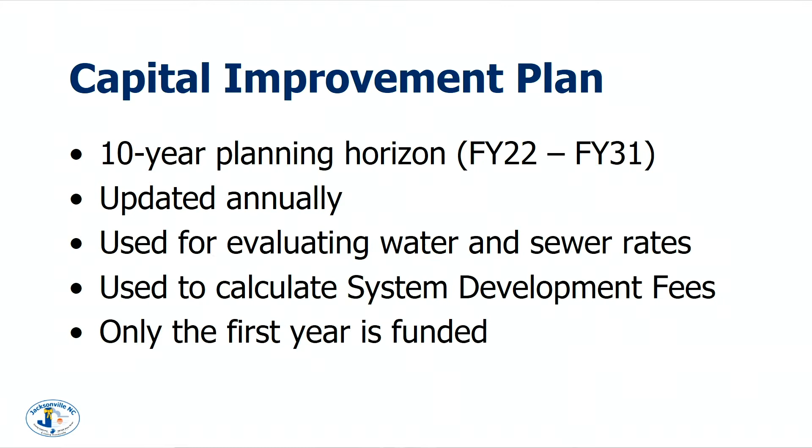We also have a system development fee model. Those system development fees are fees that developers or builders pay to essentially buy into the system, reimbursing the system for projects that have been upfronted by ratepayers to provide for additional growth. We use those growth and improvement related projects to help program those system development fees.

There's a statutory requirement behind system development fees that they have to be updated every 5 years. For us that will probably be next year, fiscal year 23. We use the capital improvement plan to program for those system development fees, and that meets all of the statutory requirements.

Again, only the first year of the plan is actually funded. The rest of those 9 years are used for planning purposes.

Yes sir, a question. When you present to the city council, all the departments are presenting their CIP to the council for approval. How does that work as far as when you're doing your portion of it? Is there a pot of money that's available that you have to fit within, or are you competing with the other departments for the money that can be given to you?

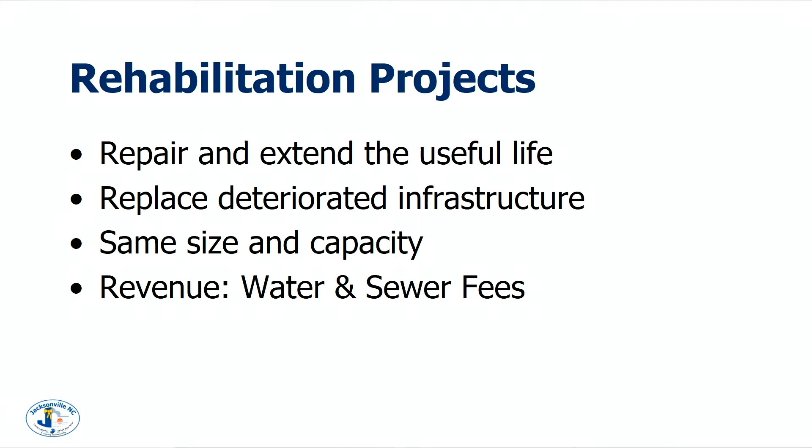The revenue source for those, again, this all comes from the Water and Sewer Fund, but within the Water and Sewer Fund, we try to divvy up the cost to where they should be applied. Because this is replacing 1-for-1, we are funding this solely through water and sewer fees, which are literally the monthly bill everybody pays. It's split out to pay for operations and maintenance, which is an ongoing everyday thing, including staff personnel, equipment, and electricity to run lift stations and pumps, but it also includes those rehabilitation projects.

In trying to decide which rehabilitation projects we're going to program or when we're going to program them, we use a work tracking software called Mobile 311. It's app and GPS based, and it rides on top of a GIS system. So we have people in the field, and when a point breaks in a water line, they mark it, flag it, put in what the repair is that they made, and from there we store that information. Then we can go back as we're making decisions and look at a geographical area and say we've got to do something here because we're really having a lot of problems.

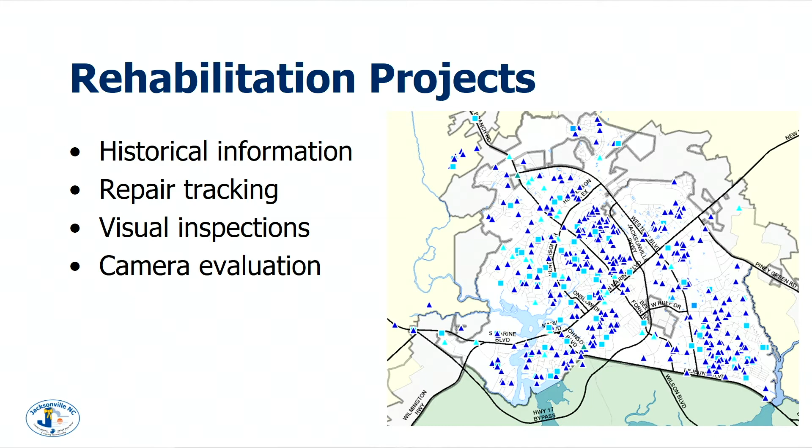A good example of this that we talked about at the last meeting is the branch water service. Over the past 2 years, we've been averaging somewhere around 50 or 60 water service repairs a year. At that point, we've got to get it out of our operational budget, out there replacing these, and get it into the capital improvement plan to do it as a project so we get better prices. It's not an emergency response in the middle of the night, and we're not having to pay overtime to respond. So we use information like that to help program these rehabilitation projects.

On top of that, for our sewer lines, we use visual inspections. A good example is the Bayshore right out front here across from City Hall. There are several depressions starting to develop right in the roadway.

That's an obvious indication that we're having problems underneath, and they're right over the sewer line. So it's pretty easy to track that we have repairs necessary there. If you start seeing those over a large area, or 5 or 6 of those along the line, you know you probably have joint failure and need to address that. Then the city has the ability to go in and jet or clean all the lines and camera the lines.

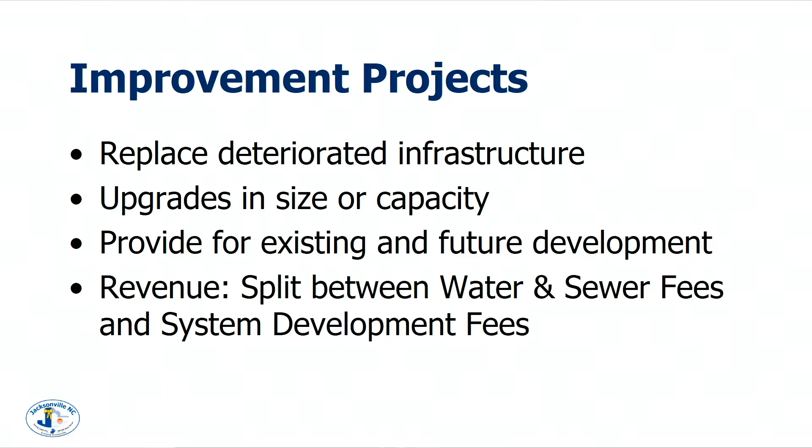From there, we move into improvement projects. The difference between a rehabilitation project and an improvement project is that the improvement project looks at infrastructure that needs to be replaced, but also considers that it might be in a basin with additional growth potential. There, we may have to replace that existing infrastructure, but based on our master plans or development pressure, it makes sense to upsize. For example, you may have an existing 8-inch gravity sewer we're having problems with, and we identify that it really needs to be a 12 or 15.

So if we're going to replace it with an 8-inch anyway, we might as well upsize it. What we do there is split that project, at least budgetary wise. The water and sewer fee ratepayers are responsible for that 8-inch portion. Using easy round numbers, if that 8-inch costs $100 a foot to replace, and upsizing to a 12 or 15 costs $125 a foot, the first $100 a foot comes from water and sewer fees, those monthly charges. The additional $25 is recovered through our system development fees. Our model actually calculates that out for us.

We do have to go in and identify what percentage of the project is growth-related and what percentage is rehabilitation, but we use that to appropriately program our system development fees so that growth is paying for itself as it develops out.

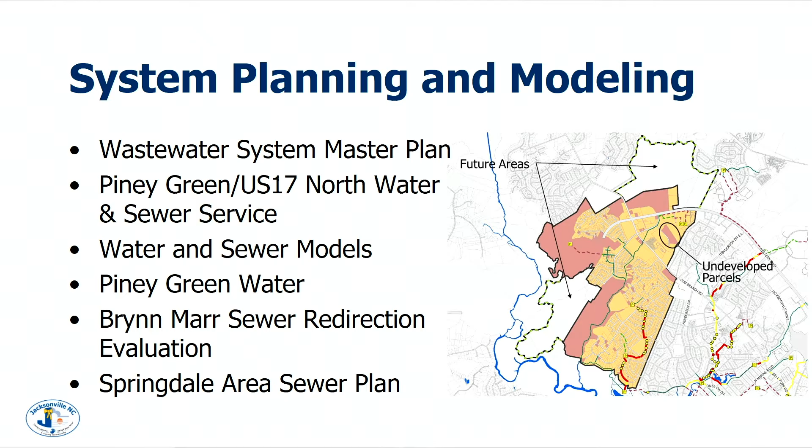I've been in public services since 2005 or 2006, I believe — it all kind of rolls together after a while. But before that, we really didn't have any major master plans or anything. We just kind of approved development, and we ended up in trouble because we didn't have enough capacity to give out, and it was during a critical time when the city was really growing. So we ended up in a special order by consent for sewer with the state. We realized we needed to really look at what is necessary and what we could balance so the city could continue to grow, but not put undue pressure on our water and sewer ratepayers. So these are some of the plans we put together — we're actually on our third or fourth iteration of the wastewater system master plan. Since it's a master plan for the entire city and where we could potentially grow, we've actually broken that down into some sub-areas.

We have a Piney Green on US 17 North, at the 17 Piney Green intersection, North 17 toward New Bern, and all the way down that triangle to White Oak High School. We've looked at that entire area and asked, could we serve it? If we could serve it, how would we serve it? And when is the real question. When would we have to be able to serve it?

We have both water and sewer pipe models. Our water model is all pipes, all tanks, including our raw water system, and includes all of our known valves, so we can actually see what putting a development into a certain area does to our pressure across the entire city. We have a sewer model where it's not quite all pipes, but major nodes, especially our major trunk lines, so we can see if a 300 lot subdivision comes into a specific area, what that does to our downstream system.

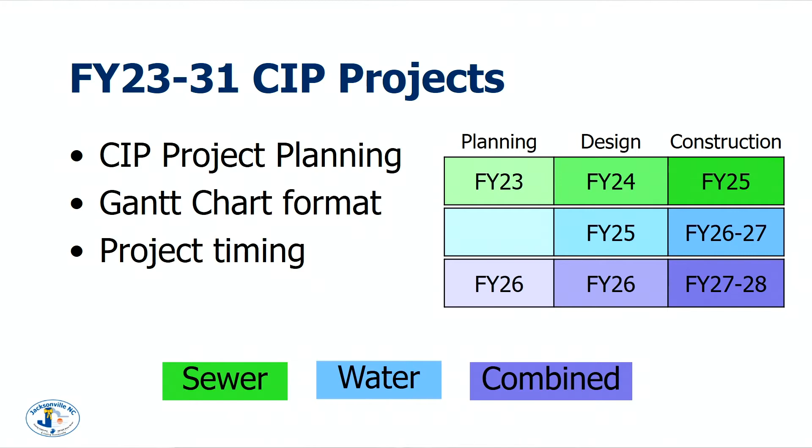We'll look at project timing. We've got somewhere around 40 projects, so I'm not going to hit every single one. Some of these are reoccurring programs that you'll be used to. I'll briefly touch on one of those and then skip over the rest. But if you have a question, please stop me. As we go through this, where you see the project name, I put a page number for you, so if you're interested in a project, you can flip right through it. If you can't read it on your screen, let me know—I can see it, and I'll tell you which page. So with that, we'll jump into some of the projects.

With those, these projects are subject to NCDOT timing and their own funding. Two years ago, these were all between 20 and 25, front-loaded in our capital improvement plan because DOT had excess funds and were trying to speed projects forward. But they ran into a cash shortage and had to stop and move some projects out. So they feed us annually, we go back to them, and say tell us where these belong in our capital improvement plan. We get updated timelines. I'm actually part of the city's transportation coordinating committee, so as these decisions are made I get to take part and closely track these projects that could impact us.

So you can see where those fall out. We do have two or three that you approved or supported in your last meeting in 22, but the rest of those fall between 25 and FY30.

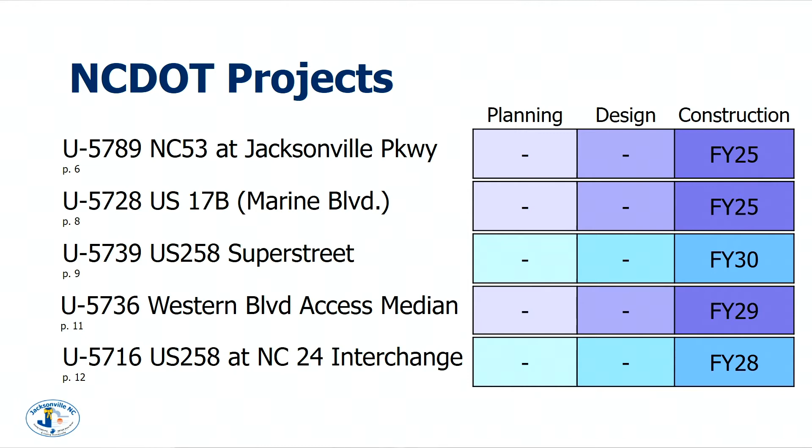Moving toward the sewer projects, you can see that we have these kind of spaced out. A couple I want to key in on - and I realize I misstated, so I'll clear that up in a second - but the first one is the second phase of the Western Trunk Sewer Project.

We are moving forward with the Western Regional Sewer System. This would be setting a pump station near Gateway North and Western Boulevard to further help take pressure off of the Henderson Drive pump station and the sewer line running along Mill Creek, which is running at capacity. It's not over capacity yet, but it is running at capacity, both verified in the field and by our model.

This is timed to start design following completion of the initial phases of the Western Trunk Sewer Project. And then the Brynn Marr force main relocation that I talked about - I think we left it in 20, actually it goes out to 30 or 31. That's one we started looking at, and I think we decided to leave it right at the end of our window. But next year, as we do our system development fee calculations, we'll probably look at sliding that another couple of years.

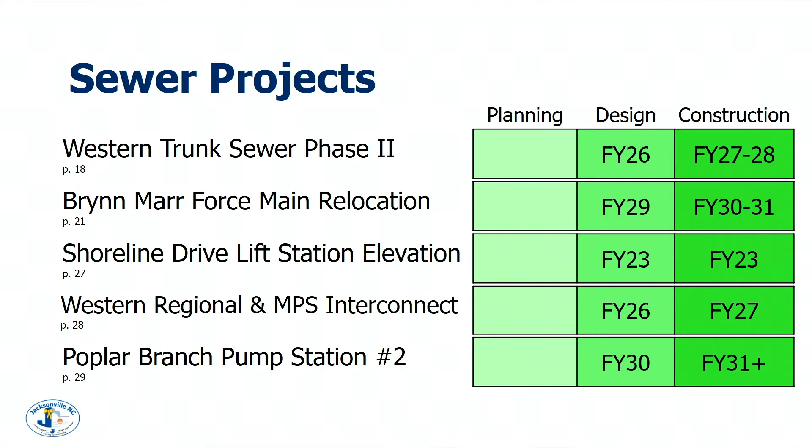And then the last one I'll point out on this page is the Western Regional and Main Pump Station Interconnect. That's shown in 26 and 27, and correlates with that second phase of the Western Trunk Sewer. This is something council asked us to go back and look at when we presented the Western Regional Sewer System.

As part of the initial planning for that project, we looked at an interconnect from the main pump station to this new regional station, so that if we had a failure in the force main between the city and LTS, we could redirect flow through this force main to the other station and still go out the LTS. So it would actually give us full redundancy in our system for the main pump station.

The numbers you see in there, we pulled straight from the original report. Those haven't been updated in probably five years or so that we've been working on this, because initially it was a concept, and based on the cost at that time, and talking with council and management, we removed that portion of the project.

So it's one of those we have to weigh the risk versus the cost. We're going to go back, update those numbers, look at what the route of the force main would likely be, what construction would entail, and then bring that forth to city council for further discussion. So that is a new project to the capital improvement plan.

Still under sewer projects, most of these, with the exception of the first project on this slide, are rehabilitation projects. The first one on this slide, you may remember, last year we renamed it. We had called it infiltration basins.

We have a study looking at possibly converting a portion of the spray irrigation system to an infiltration basin. The advantage is you're not as impacted by wet weather periods like we are with our irrigation. The first two sites we looked at were basically a wash, so we would gain some benefit, but the additional capacity we'd gain didn't really outweigh the cost we'd have to go through.

But the consultant said, while you identified these areas, there are a few more you really want to consider, and in addition there are a few areas where we could improve our irrigation capacity. So we haven't carried that study much further, but that's something we'll need to do. So we renamed this project so we could go either way with it. If we look at infiltration basins, we can go there; if not, we can look at irrigation improvements.

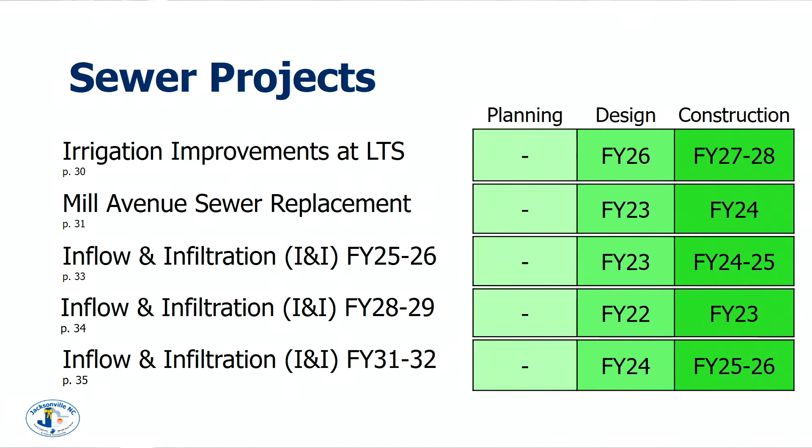Those did not get updated -- those are my fault, I apologize. So the way this would work is 25 should say design in '25 and construction in '26. And then the second would say, so you take '27 off -- really what's happening is construction starting in '26 lags into '27. Then design of the FY 28/29 project would be '28 and '29. The dozens of times I looked at this, I still missed it. Thank you, I was confused. Well, no, I appreciate that.

And then moving to our water projects. The first project is simple replacement -- I say simple, but we have a lot of issues with the Memorial Drive water line. That's the line that runs along Memorial Drive beside the hospital. Memorial Drive loops around, so it runs all the way around and serves all the doctor's offices. We have frequent calls about water main leaks in that area, so this is one we've got programmed for replacement.

The Castle Hayne water supply wells project is really an improvement project -- not exactly rehabilitation, but it has benefits for existing customers, because it will enable us to better spread our well rotation and better manage the aquifer. It also gives us additional capacity if we need it. Of course our capacity is limited at the plant -- it can produce up to 8 million gallons per day with some improvements, but right now we're running somewhere between 3 to 4 million gallons a day from our plant.

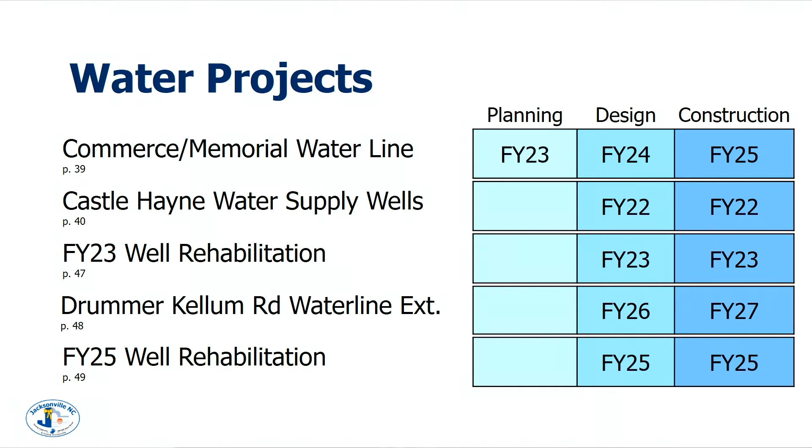Then we have the Drummer Kellum Road waterline extension. This project was identified both off of existing infrastructure and off of needs for future growth out in that area. There's some opportunity to partner with ONWASA if we need to, but we currently have water service between Piney Green Road and Halltown Road. It's served by a 12-inch main that dead ends right now; it's not looped back into our system. That's something we will need to try to do in the future, and that would be part of this project.

The water plant odor control expansion really is one of those projects that'll be timed based on when we think we'll need it. As we continue to use the water treatment plant, we will have additional odors. Remember, Castle Hayne is a high quality water, but it does have that sulfur smell. So we treat for organics, for water quality, and we treat for smell. The odor control is what helps remove that smell. This will be based on how the plant's operating, and part of being good neighbors with the surrounding community and with what's still remaining in our water.

The southwest tank is probably the other one I really want to highlight. Right before Greg Michaud left, he and I did some preliminary modeling to look at our pressure zones in the city. The city actually has two pressure zones: a high pressure zone, which is not all that high, somewhere around 65 PSI, and a low pressure zone, somewhere around mid 40s to low 50s. There's quite a difference there. The boundary is kind of the older areas of the system, including Northwoods, the downtown area, the Georgetown area, all the way out to Yopp Road.

Okay, and then the Halltown Road waterline extension, that is strictly for growth, and that's programmed out. We actually did have some interest in the 17 North area with an industrial site that was looking at possibly coming into the city, but they ended up going somewhere else.

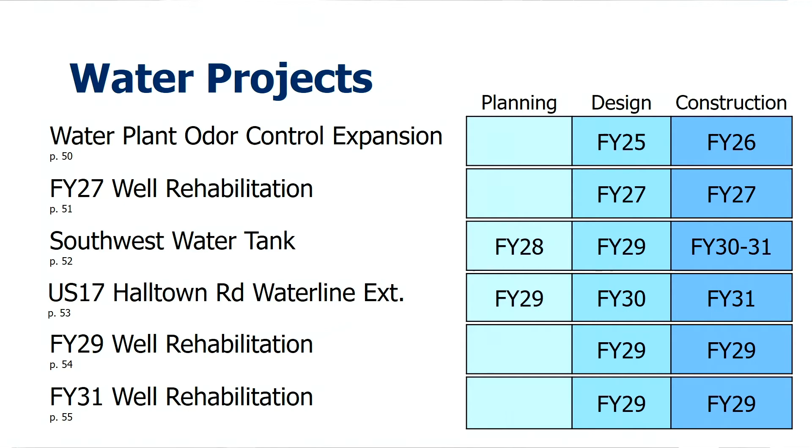Where is the city limits up 17 North? Well, right now, if you're looking at property-wise, the Stevenson Toyota and just short of Halltown Road is in city limits.

And then if you'll look at page 59, this is one of those good examples we talked about where we do have split funding. Old Bridge Street Infrastructure and Streetscape is a project where we need to come through and make some improvements - improvements isn't the right word. Those water and sewer lines are pretty old, and we need to address them. They're not as bad as Newbridge Street, so that's why this project is a little further out.

But there are some replacements we need to do in that area. If you look on page 59 under funding sources, you can see we have the Capital Reserve Fund, which is general fund, then we have the Water and Sewer Fund, and then we have DOT. Based on the estimates we have available, we've attributed the part associated with water and sewer to the Water and Sewer Fund, and the part attributed to the street is under an NCDOT grant that we would receive. To do that, we would take Old Bridge Street as one of our streets. But that's a good example.

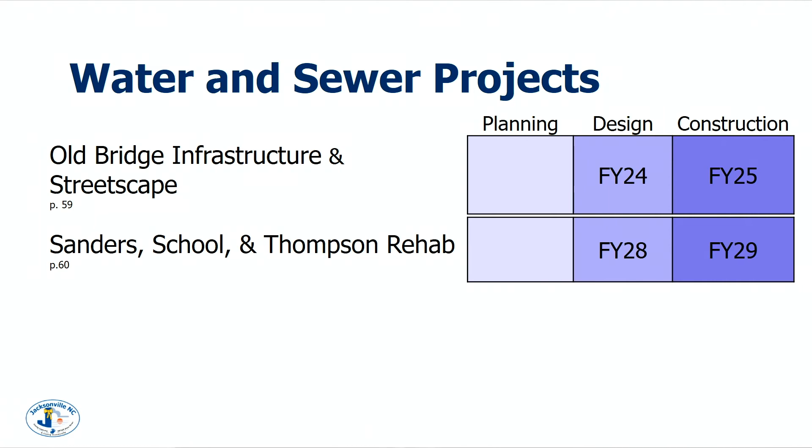Like anything with some of these rehabilitation projects, the priority can shift based on conditions. A great example is Seminole Trail. We have a segment of sewer on Seminole Trail that, following Hurricane Florence, really started causing a lot of problems. If you drive down the first block of Seminole Trail off of Sioux, it's like this. It's because of Hurricane Florence, everything was saturated, and as everything ran off, it just carried the dirt with it, and it started settling.

We've actually found that over time, that's pretty frequent after major storms. As we start to document those, we're hoping that if it happens in the future and we can find them fast enough, there may be some FEMA funding available to help offset those costs. It's storm related, but we do have to prove that it is related to the storm. Our digital tracking helps with that.

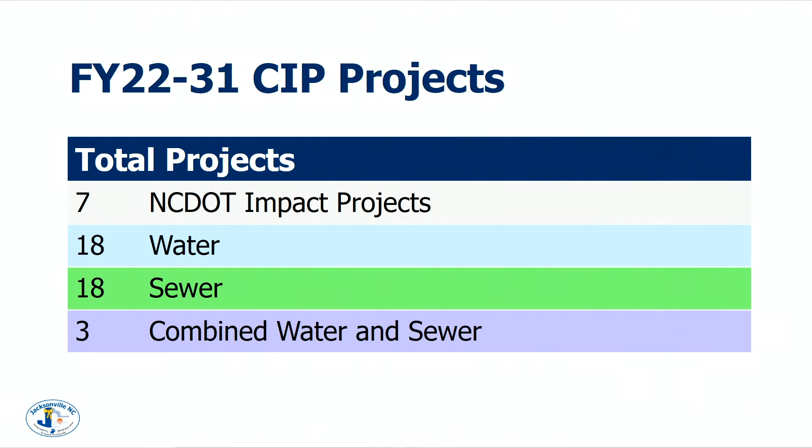Do you see, as you're projecting now, that this will be capable to stay within the water and sewer budget, or are you going to need bonds for any of these projects? The only project we're looking at bond funding is the Western Regional sewer system, which is about a $40 million project.

And that project we are looking at using revenue bonds for. The rest of these, we're looking at primarily cash funding the projects.

When we update our water and sewer rate model, it looks at how you plan to fund this. So if you say you're going to cash fund all these projects, it looks at not only your operating budget and revenues, but roughly tells you where your cash balance is. We can look out 10 years, which is a long way to project, because we don't know what's going to happen to gas prices.

We don't know what's going to happen to material prices. Right now PVC is off the charts. We're having trouble getting contractors to verify their prices for very long, because PVC suppliers won't guarantee them. In fact, we're bidding a project right now, and one bidder said, I just want to make sure you'll accept ductile iron in place of PVC, because I can get a guaranteed price on ductile iron, but my supplier won't guarantee a PVC price for more than a week.